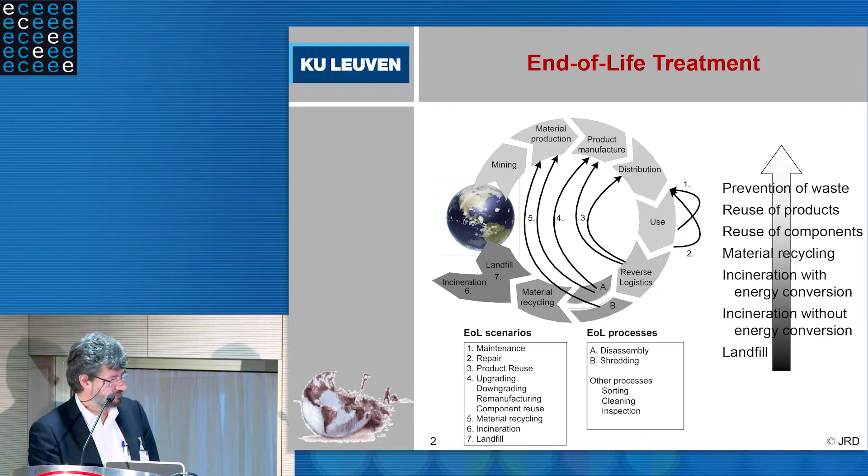But this is what it is all about, and I'm sure you know this kind of scheme. What I would like to talk about is not so much the use phase, the energy considerations, not so much the repair phase, although that could also be facilitated, but also the biggest challenge: how about the ultimate end of life? Can we still, at that time, recover materials in a way that we can really talk about closing the circle?

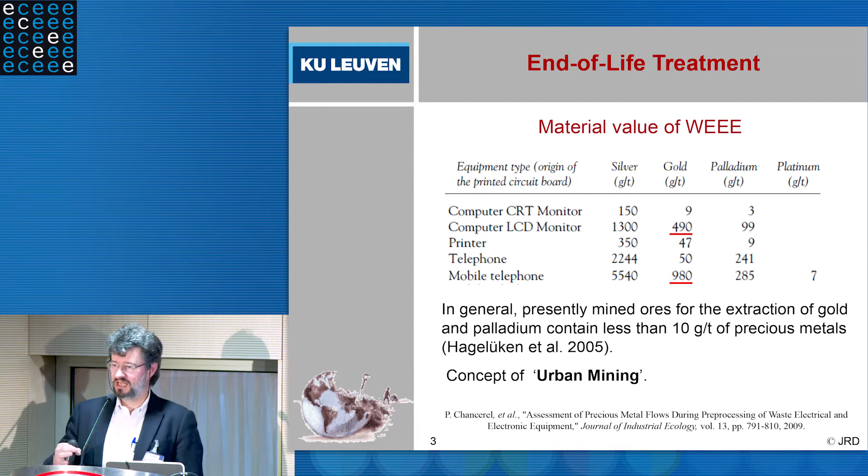We all know the motivation for that, the idea, and these are some figures from people working very closely with the end-of-life treatment facilities like Umicore. The amount of materials in there make it really worthwhile. There's more materials in those historical landfills than there is in the mining ore where they originally came from. So that should be lucrative.

So how good are we at getting them out? But this is very much where the trouble starts. This is what we do. In Europe, we have legislation that obliges countries to organize a collection scheme, and this is what it looks like if you take, for example, the very polyvalent kind of waste of electronic equipment.

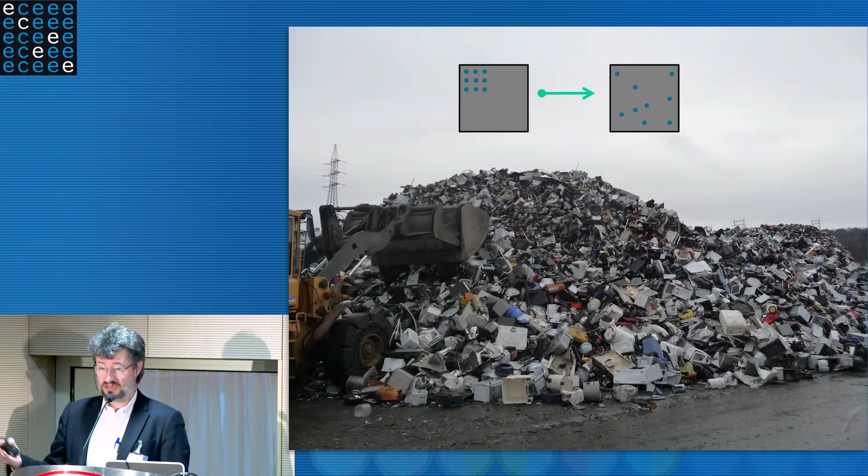We are collecting a lot, and we are mixing it, and it looks very much like this. Now, in terms of thermodynamics, what we are doing here is turning structure - that's what products are. We know products, we know what is in there, we know where we can find certain materials in the products, and we are turning that into chaos within seconds by just mixing it in this kind of environment. That's the second law of thermodynamics. We are increasing entropy tremendously fast, and we know it costs a lot of energy to undo that. So that's really making life difficult.

The question is, could we do any better? Now, what is the effect of that? These are numbers from Hagelüken - Christoph Hagelüken is a Umicore co-worker. So this is about gold, and then there is southern economies.

These are examples from a country like Ghana, where we know there is fairly big effort to collect waste streams because people earn a living from that. They then treat those waste streams fairly intensively. With a screwdriver, they take apart products, and then the big trouble starts because then they don't have the appropriate technology to take out the gold and the copper and the other valuables, and they use leaching techniques you don't want to be near to. That's where tremendous environmental issues also occur.

The end result of all those efforts is an efficiency of about 20%. Now, if you look to Europe, if you look how we are doing that, I have to disappoint you, because we are not doing too bad and we are improving in the collection schemes, but then we apply the techniques that I just showed you the snapshot of. We start mixing materials and we start treating them very crudely.

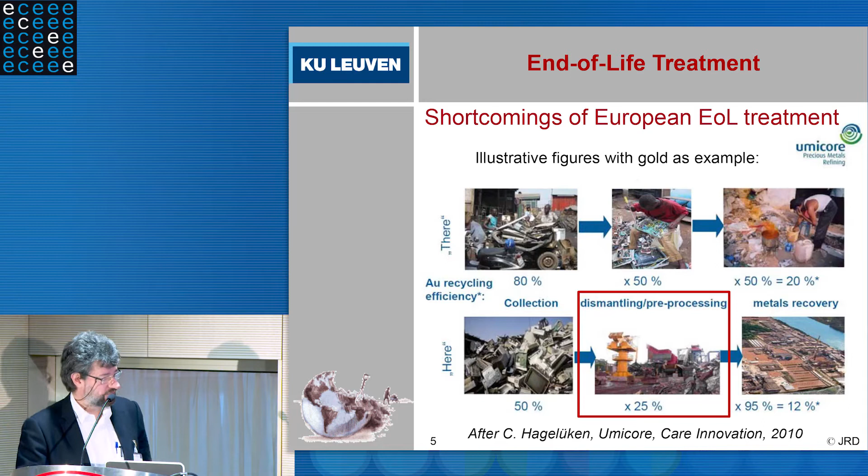So we have to get a lot more efficient if we ever want to get close to the 20%, to the 50%, let alone the completely closed loop, the 100% that we are dreaming of. I'm going to try to tell you what is the state of the art, how well could we approximate that if we apply best available techniques, mainly oriented to improving that second stage.

We have the products, we have to pre-process them before the chemist or metallurgist can actually extract the materials. Some decades ago, I got a bit fed up with the big dispute: should we go for destructive shredding for recycling, or should we aim for disassembly? For every successful disassembly activity, there were at least two examples of people saying, we tried it, it doesn't work. I remember in automotive, at some moment they said, we don't want to discuss disassembly anymore. It has been tried and it's totally ineffective.

We found a cluster, a fairly big one, that contained cases - all existing disassembly activities, so they need some kind of profitability to sustain. What did we find in there? We found products with a fairly long lifetime, like trucks, photocopying machines, medical scanners - big devices with a high residual value after many years of use. That was the first category.

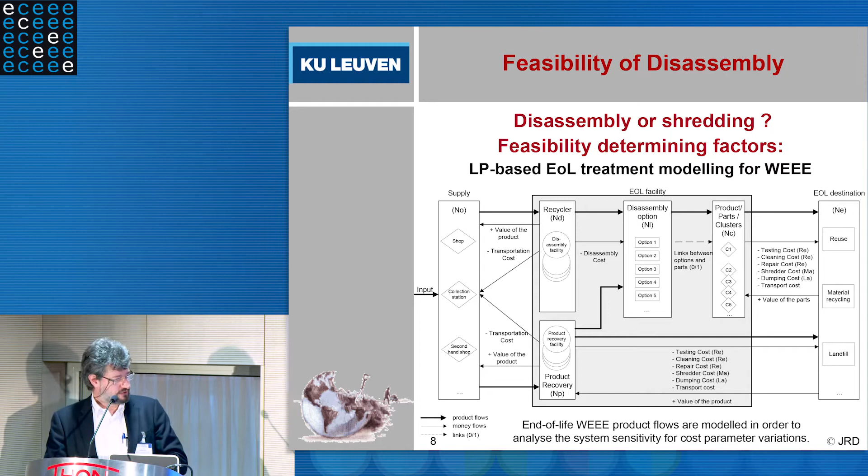Our big question was: how much should we now improve the efficiency of disassembly before this network, assuming that every player in that network was greedy - every player would just look for his own benefit, his own economic optimum, and take decisions accordingly. So how can we steer the product streams so that most of the products would finally get treated with disassembly, taking out the most materials? We looked at time spent on that - we measured times, we calculated the cost.

For some products, it's totally infeasible. If you take an electrical water boiler, whether you shred it or disassemble it, the output is about the same. There's no benefit at all, actually. You would have to drop the cost by about 100%, and that's totally infeasible.

But for high-end products, like washing machines or computer systems, you would have to drop the cost at least 65-70% before it starts getting a chance. So that's the challenge: we have to make disassembly at least 65-70% cheaper before this economically becomes the dominant scheme. So the big question is, can we do that?

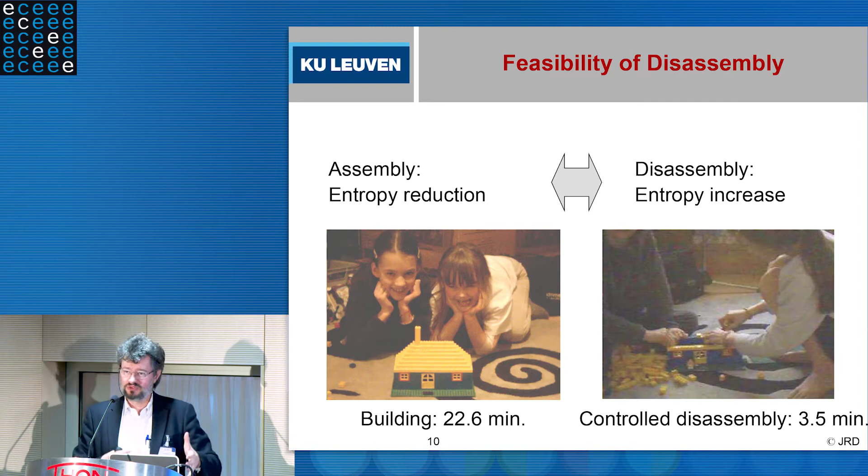I remember telling colleagues, now we want to make products that fall apart like this. Some of these colleagues would literally shiver - like, I spent half a lifetime avoiding that, and now you want me to make a television that will fall apart when you do something special with it. So, what is the problem?

Every disassembly system we've studied would typically use one-to-one disassembly. You put in a screw, you have to take out the screw. You make a spot weld, you have to drill it open. You make a glued joint, you have to break it open. That's very much the state of affairs we see today.

We would like to get to one-to-many disassembly - one signal, one action that can deal with the whole product, and even preferably a batch of products. Just put a pallet of products in a facility and try to undo those joints collectively. That would probably allow much higher efficiency. So let's see how far we've evolved in achieving that.

It's nice to think like that and say, okay, let's do magic with products. If we all agree we can do magic, the problem is solved. It's not that easy. So we baptized this thing EXTRACT - externally triggered active disassembly. I must admit it has taken us two generations of PhD students to mature this, but I think we got there.

There are two approaches for these one-to-many fastening techniques. You all know some examples of products that are very easy to take apart, but that's because a designer was asked to make a special effort for that - what we call disassembly embedded design. I'll show you some examples later, where a designer says, okay, we would like a button.

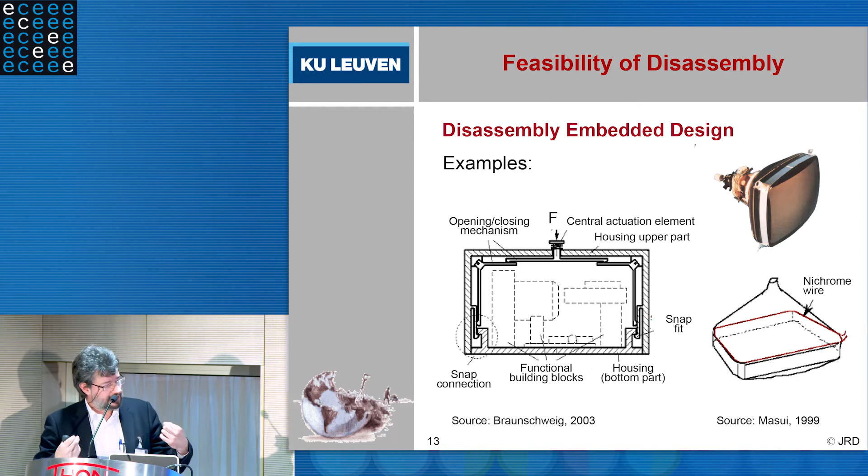Can be done, but it takes effort and probably some money. This is an example for a CRT screen: a cast-in Nichrome wire—you put some current over it, it creates thermal stress, and the CRT tube will break exactly where the different types of glass have been joined. So a little investment, a little effort, a little design precaution, and you can actually disassemble or separate materials easily.

An example from Dell: within seconds you can open such a cover, pull all the green elements, and within so many seconds you can really take apart this computer. This has not been designed by Dell for end of life—it's for maintenance purposes, for service stations.

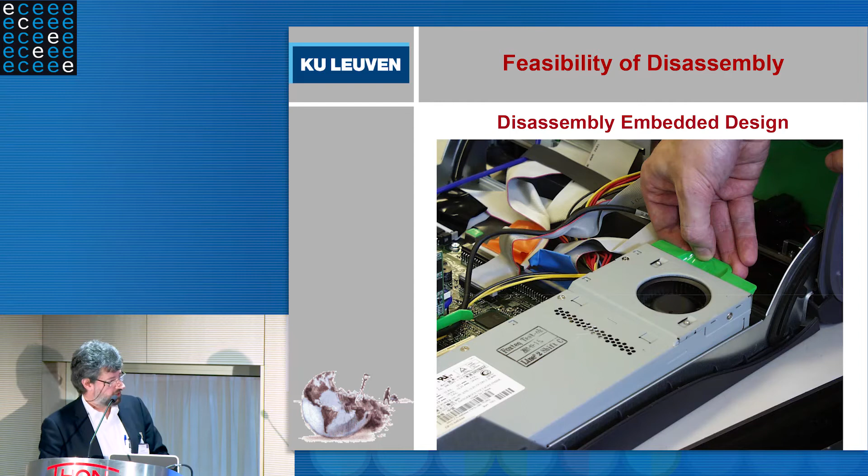We used to have such systems in our university. Students would come back, say it doesn't work, pull out a hard disk, plug it into another computer—one minute, two minutes, and they're gone. They can be helped, actually. So they do that for service purposes, not for end of life, because it costs extra money.

And now we get to this externally triggered principle. What kind of joints, what kind of technologies would allow us to facilitate externally triggered disassembly? There has been a whole generation of efforts with people working on shape memory polymers, shape memory alloys, and thermal effects—you heat up a product and it starts to behave in a certain way. This has been tested and has shown quite some disadvantages.

You have to heat fairly high. You have to imagine the natural boundary conditions for such a product. If you ship a television set in a container, on top of a ship or in a harbor in the sun, you get to 80, 90 degrees in the container. So you have to stay above that. If you go above 100 degrees, very quickly you start to damage electronics. So it's a delicate thing, and it takes time to heat, it takes energy, and afterwards you get stuck with a hot product. You have to take all of that into account.

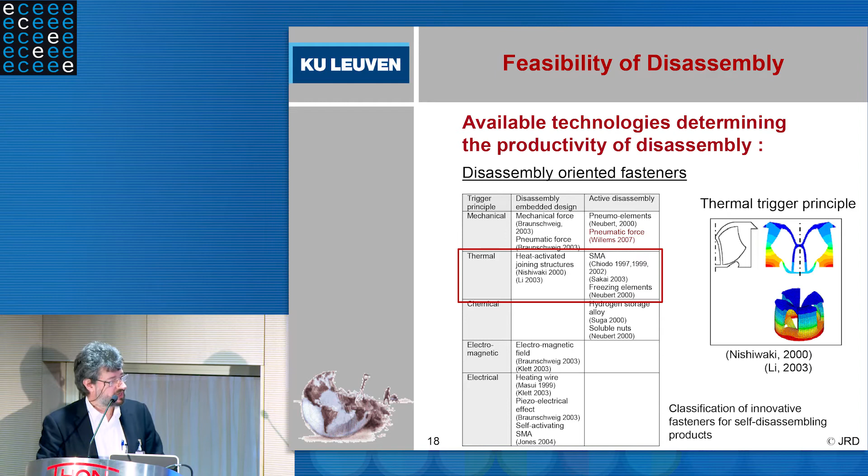Also, the shape memory polymers used tended to be non-stable over time. They were not shock resistant, so there were a number of technical difficulties.

We have limited time, so I'm not going to show every clip here, but perhaps I should show you this one—an effort by some industrial partners we have been working with.

This has been tested by Onetoone together with Philips, and they can actually do that. Functionally it works, but it still has the objections I mentioned: energy doesn't come for free, and you need special facilities to activate that—every product would have to go into some kind of oven.

The next effort we studied and found quite interesting was some soluble nuts. If you have a bolt and nut connection, and you can dissolve those nuts in some chemical environment, could you make it fall apart just by being somewhat patient?

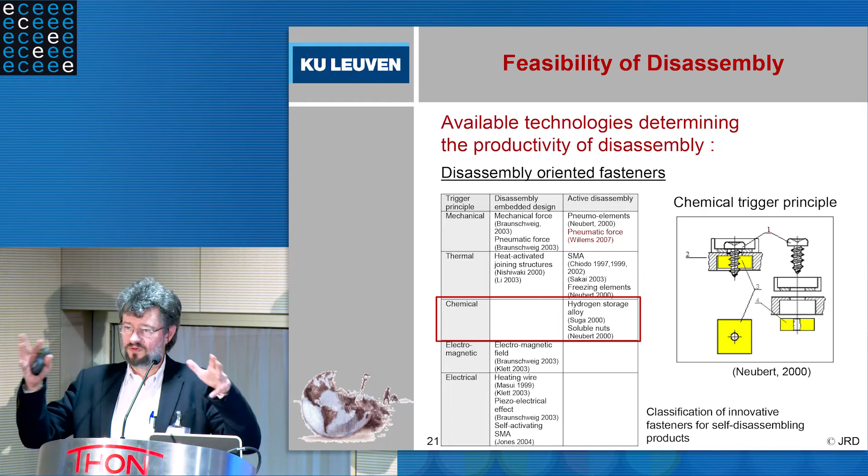Patience is very much what is needed here. It's a slow thing. You don't want those nuts to fall apart during functional lifetime, so you have to stay away very far from natural circumstances. Humidity are issues, and will this still work 10, 20 years from now?

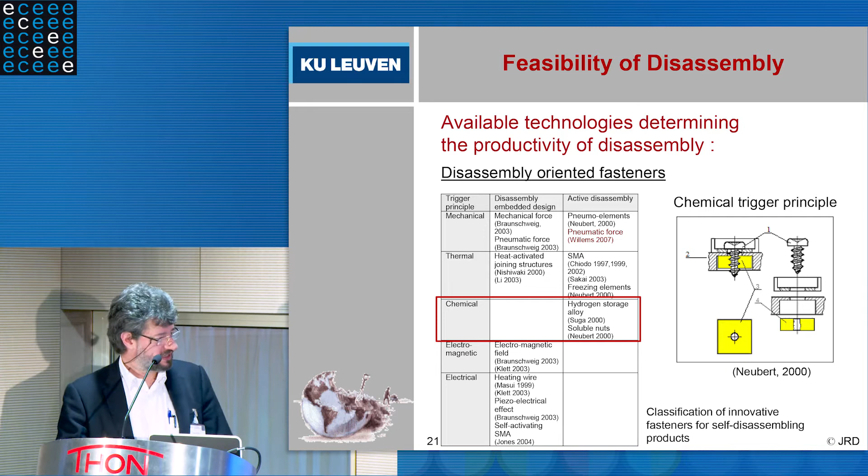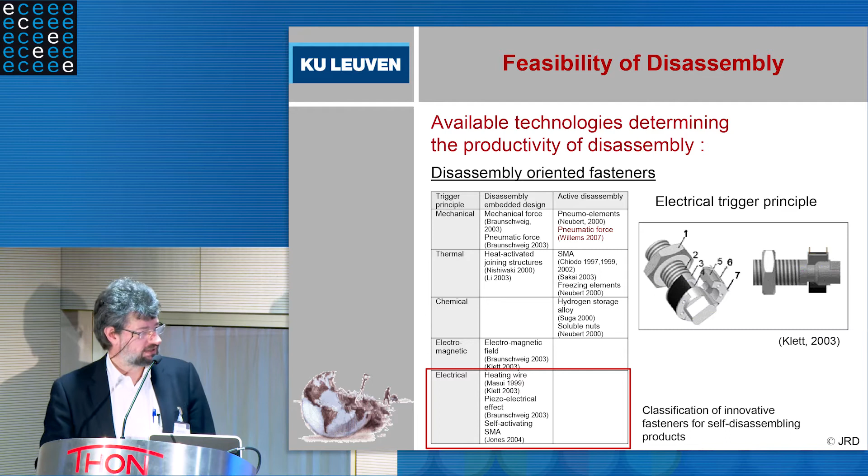Some efforts to do that with electromagnetic fields. This isn't really the exact principle, because you would have to orient that magnetic field quite well, so it's not really an external trigger. Some efforts with bolts and nuts with electrical signals, making the head of a bolt fall apart. Not an exact example either.

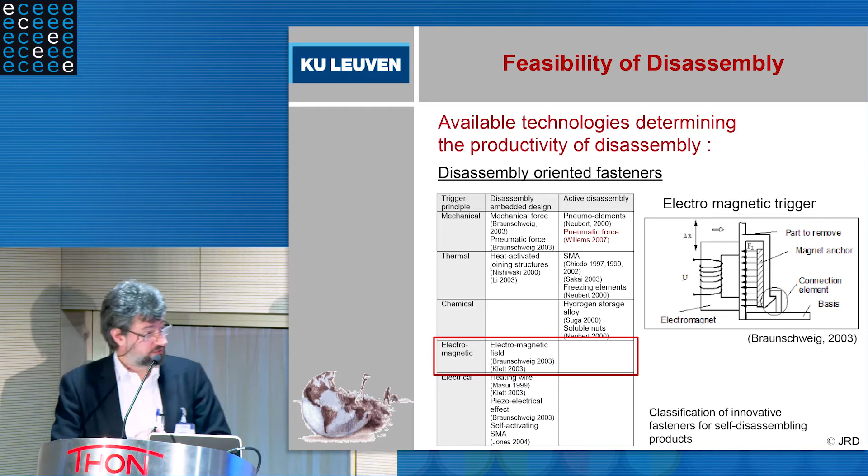And then this is the contribution we have been working on. We found pressure a fairly interesting signal. Why? Because in our own environment, we are very sensitive to pressure. If you are asked to enter a room that is 1 bar up from your natural environment, you're in deep trouble. On the other hand, increasing pressure in a chamber 5-6 bar is cheap.

Every pneumatic network can do that. We'll typically have a 7 bar pressure. It's cheap, it's fast, energy-wise it's not very expensive, it's clean, doesn't leave a history afterwards. So okay, we decided that pneumatic triggers were very attractive.

I remember asking these people, is this future-oriented? Aren't we going to get in trouble with your next generation? And their conclusion was, let's first walk before we start running. And so let's try this.

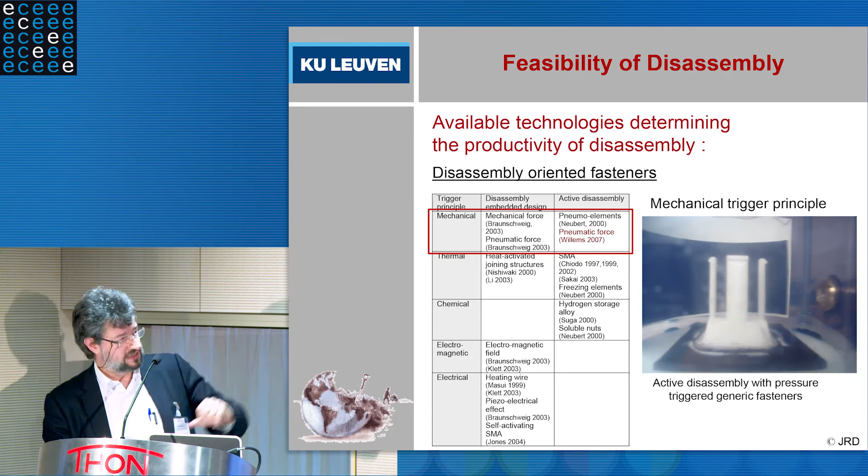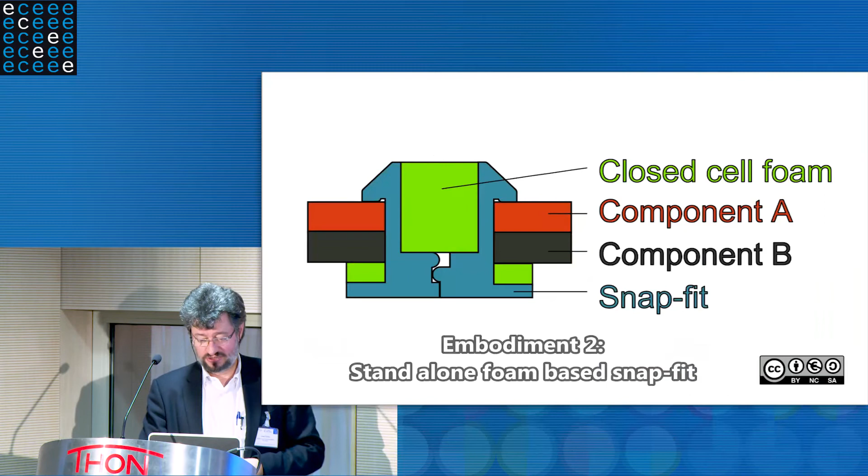So again, the height of this thing is about 3 centimeters. So we found, okay, it's a good principle, it's just not very practical for the small snap fits that we have in mind. So that brings us to some mature developments, and this is just 3 years old now, end result of a whole series of developments that we did.

And this is again one with pneumatic thing, but now we work with foam. This is a closed cell foam, and when we increase pressure it will indeed compress that foam. The kind of devices that you know, this is a little modem. So if you have to open this to get out the electronics, you're going to lose money on that. It will take too much time orienting, screwdriver positioning, opening 4 or 5 screws.

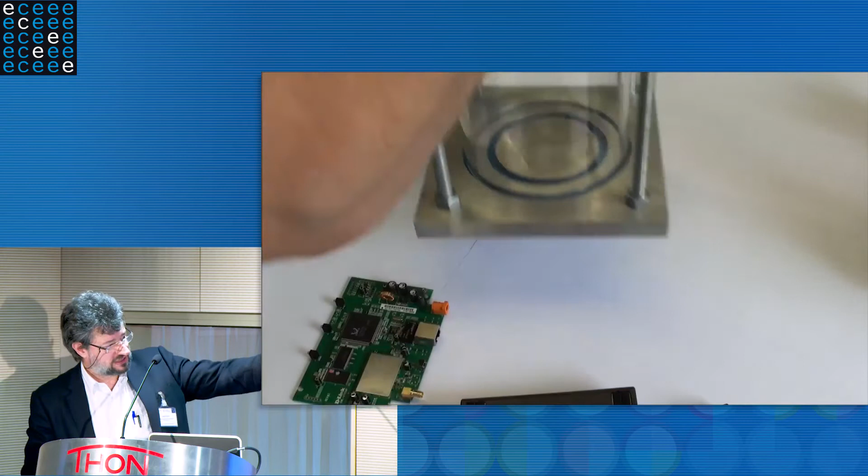This is the same thing put into a vessel. Now you see this is already the second stage. Here, to make it a bit more visible, we put in a piece of spring steel. So after the unclamping is happening, the thing opens automatically. This is, I hope you agree, very close to a self-disassembling product.

And this is what you get out. In this case, with shredding, that PCB would have been totally scattered. Over here, you just have to take the effort of sorting it, of putting it into the right basket. That was for the idea that we could help companies that would have perhaps a bond to their product.

I'm thinking of companies like ICT, telecom service providers, network providers, that put these set-top boxes in your home. And at some moment they take it back because they are outdated, they have to be renewed, they have to be upgraded. Whatever they do with that box is none of your business, it's still their property.

And they collect thousands of them. How do they treat them? Now this would be a way for very systematically either separating the materials or opening them for upgrading, for making the necessary adjustments. But you would still need, as a treatment facility, a dedicated setup. You still need a pressure chamber and a way of systematically handling the products going in there.

So we were anticipating what with the real end-of-life treatment, where products end up in any possible facility, any possible treatment plant without special infrastructure, without special pressure chambers set up, for example. So this is another generation of joints we have been working on, and the idea here was what can we do with the mechanical effort.

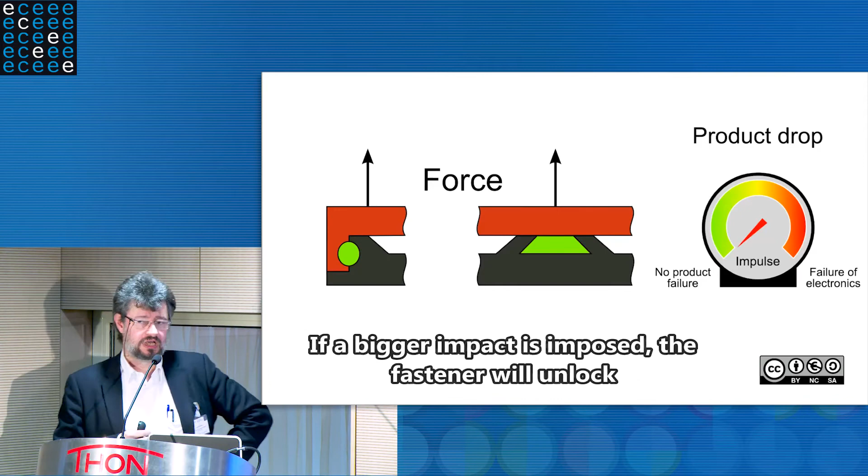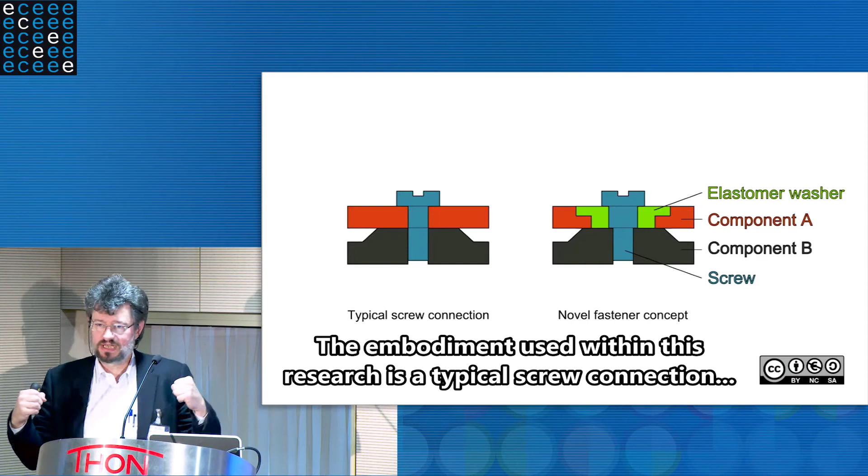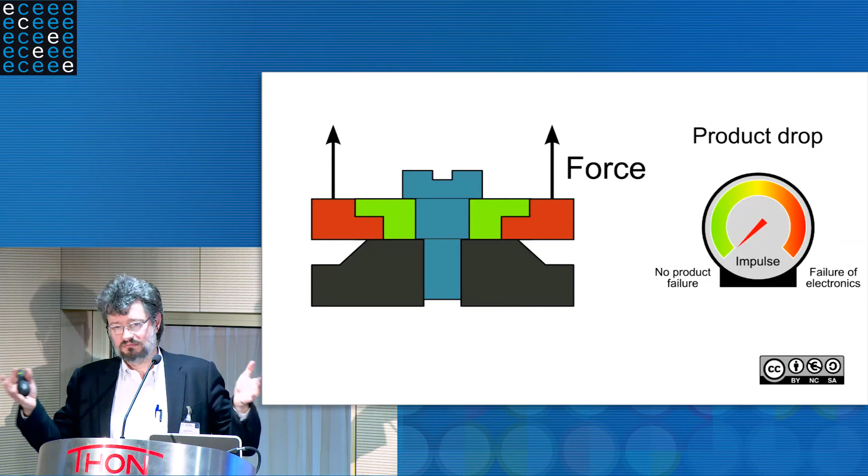So this is a principle where we use elastomers, very cheap material, and we had as a challenge in mind: what about force? What about mechanical force, but force that is sustained over a long period? If I think of my television, if I put a force on it and pull for 5 seconds, am I allowed to take apart my television? Would you allow your kids to do that? Would you blame them for destroying the TV?

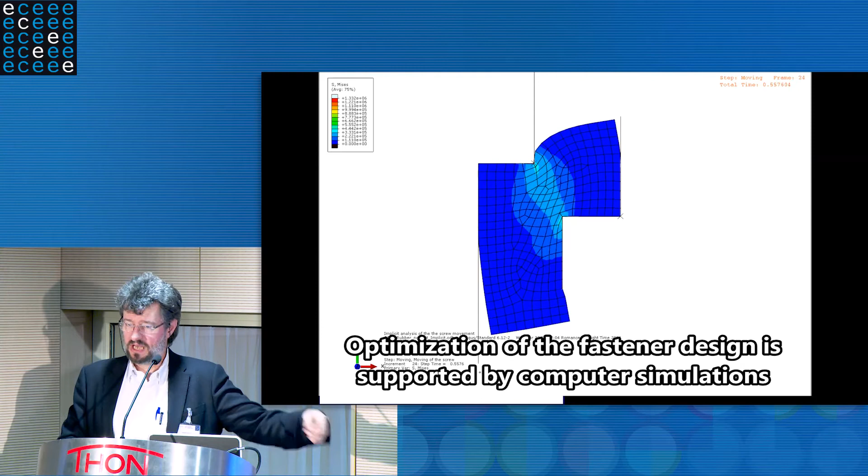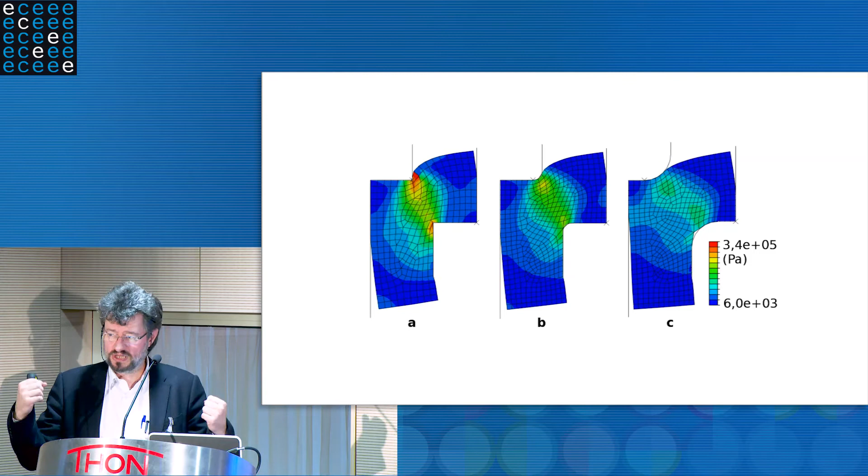Or would you just say, yeah, if you do that, then the intention was to take it apart? So that's what we have been studying. This is a joint. If you just have a big force shortly, it won't achieve anything. I'll show you later that indeed this can be done. But if you sustain the force at a sufficiently high level, sufficiently long, you're going to pull apart the TV without a screwdriver, without any special devices. That's the principle.

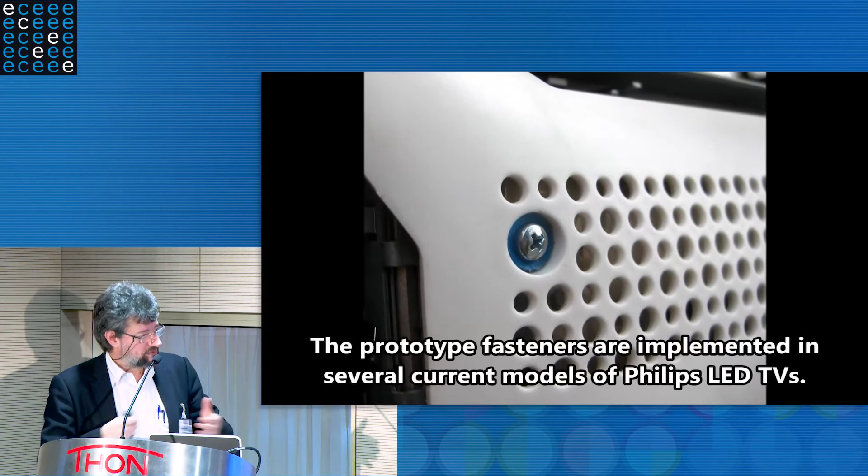And so we calculated these things. The theory was nice, and this is what the prototype looks like. This is made in some backyard job shop, so very primitive prototyping, and we mounted it on some televisions, again together with our preferred TV developer.

And this is the elementary functional test. If I put a force on it for a number of seconds, can I make sure that the thing is not destroyed if the force is at reasonable levels? It still has to be a back cover that serves its purpose, protecting your TV. That's the first test, the functional test.

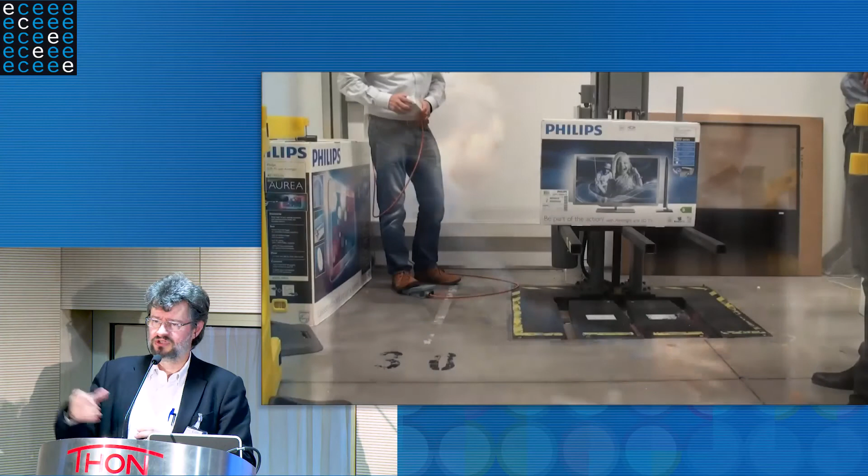Second consideration: how about rattling, how about noise? I once bought a TV that was put together with screws, and at low noise frequencies it would start to shiver. That's not a good sales argument. So this actually helps. This kind of joint actually helps with that.

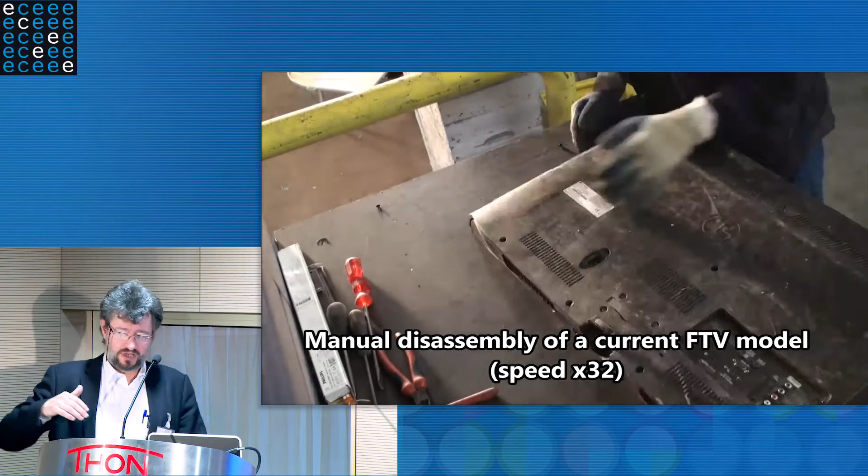This is a drop test. These are standards - if you sell products, they have to survive certain mechanical loads. So we tried all the different tests in the packaging: drop test, vibration test. If you're driving with a TV in your truck on the Belgian cobblestone roads, is your TV going to be disassembled as a result? No, it isn't.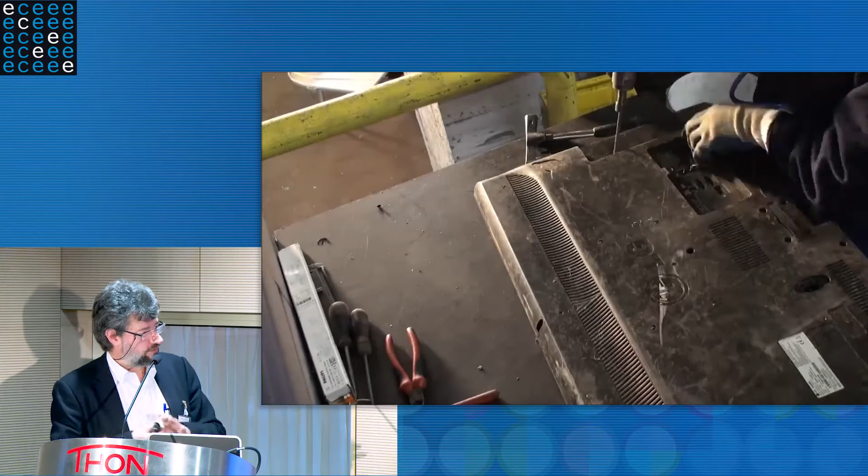And now the proof of the pudding is in the eating. This is the conventional disassembly, with a screwdriver. That's the reference - it was sped up, but it takes more than 2 minutes to open a TV.

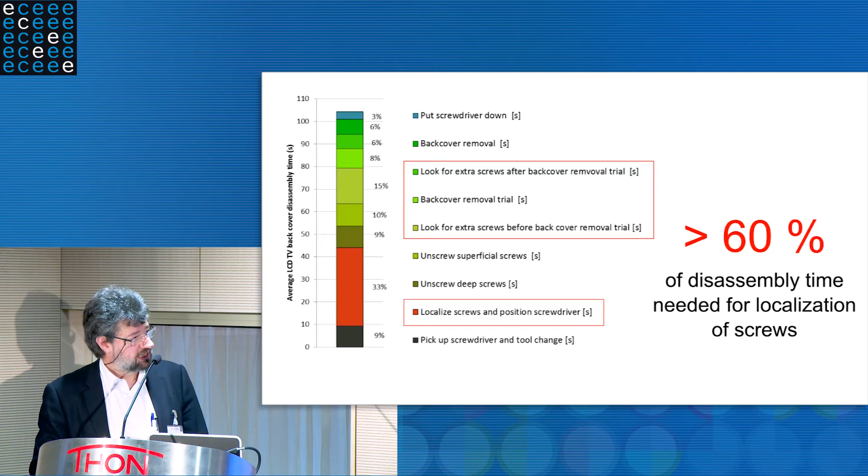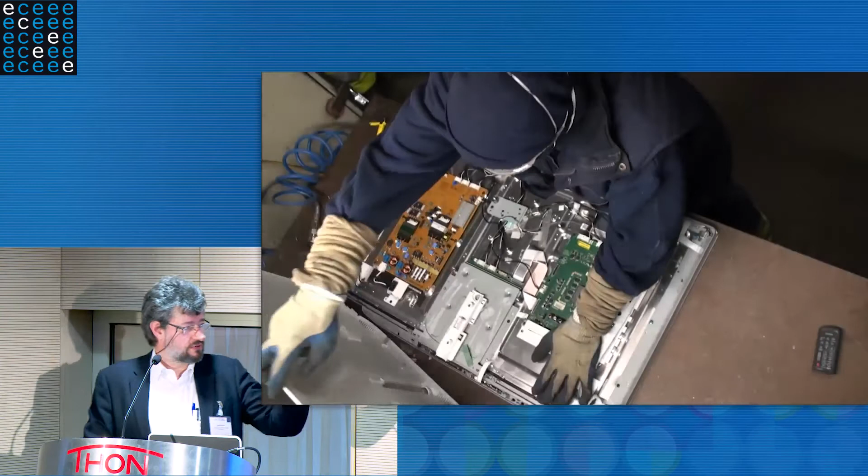Statistically, that's a 70% reduction - okay, that's within the scope of what we had in mind, at least a 65-70% improvement. That's an experienced guy doing exactly the same thing, knowing this kind of system, and he only needed 12 seconds. So he went down 90%.

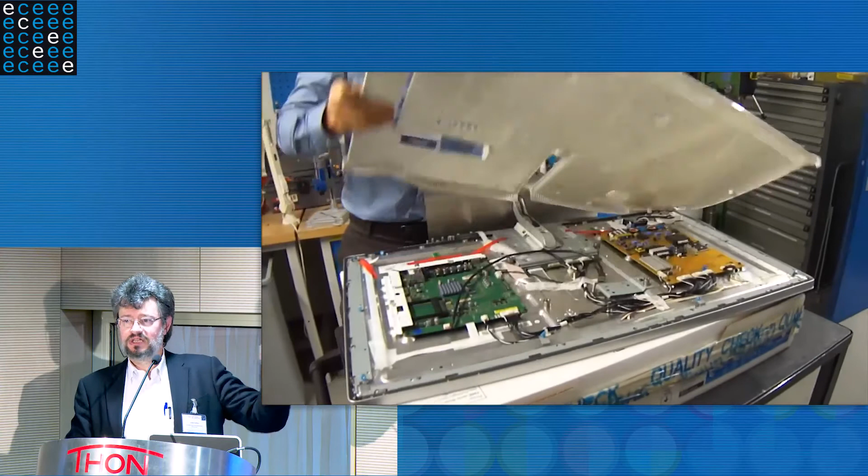Of course, I hope you agree with me, for your TV this might be okay. But if the dashboard of your car can be pulled off like that - if it's parked in front of the hotel and some guy wants to steal your radio and takes out the dashboard to do it - you won't be too happy, I think. So there are products for which this is perfectly acceptable, and there are other products where we would need an adjusted version, but the idea is there. It can be done. And that's what I wanted to end up with.

We did a lot of developments with Philips. Philips TVs - it's not Philips anymore, it's now TPV, a Taiwanese company. If you buy a Philips TV, it's made by a Taiwanese company, and there's not a share of Philips money in there anymore. Philips was interested in the visionary aspects of eco-design. I had some of my graduates working there, and it was fun to see some of them winning prizes for green TVs.

And at the same time, and it shocked me, they would state that the expected use life of TVs... Philips used to have a policy that for 10 years they would guarantee spare parts and access to services. They said we don't need that anymore because the average TV now is only used for 7-8 years. People accept that, and we expect the lifetime to go further down to 5 years. And they were happy telling that.